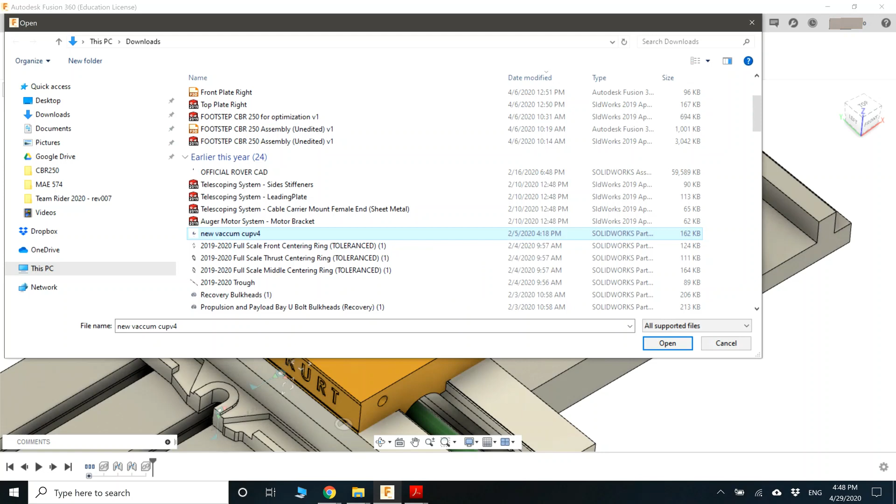You can see here that when I click on import, the SLDPRT part, it's actually processing it, and it's gonna be able to open the part straight from SolidWorks, which is really good. But sometimes if you have a very complex shape, that might not be the best idea. You may be better off if you just export the file on SolidWorks from SLDPRT into a STEP file first, and then you import the STEP file into Autodesk Fusion. This might process a little faster if you have a complex shaped part.

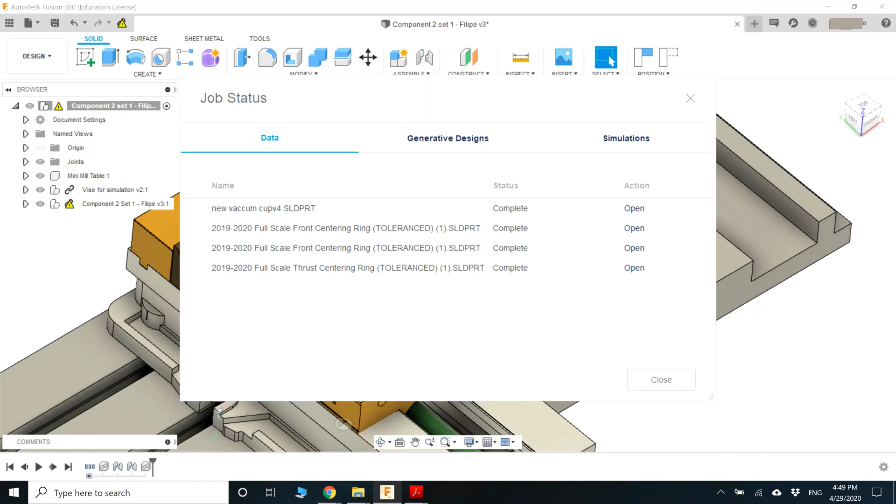Once we have the part in here, I didn't really use the part that I just imported, it was already here. So once you open the part, you can pretty much do anything that you would do with a STEP file in any other CAD software or any CAD model, any solid model. You can create new sketches, create new planes, and start constructing stuff, start extruding stuff, start filling up holes, making fillets, you name it, just like any other regular CAD software, okay?

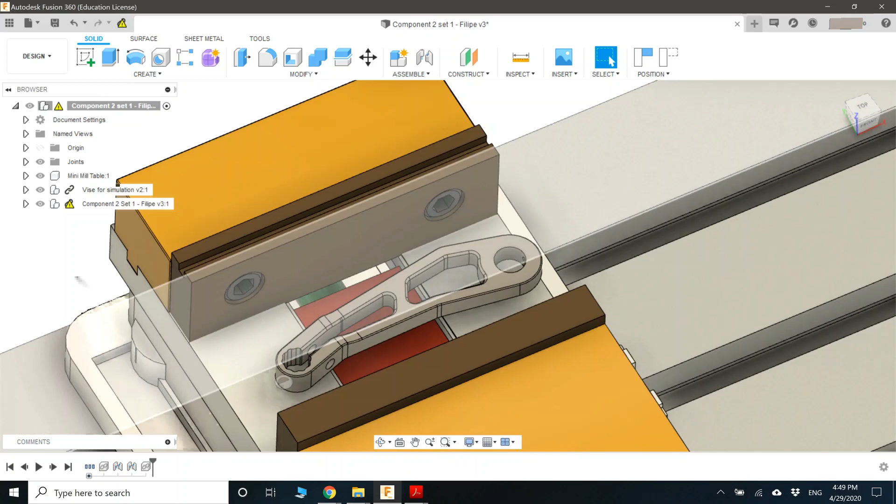In our case, we're not really going to change anything in this file. Remember, this is just a tutorial, quick introduction on how to get started with manufacturing. So we're going to switch from the design workspace to the manufacture workspace.

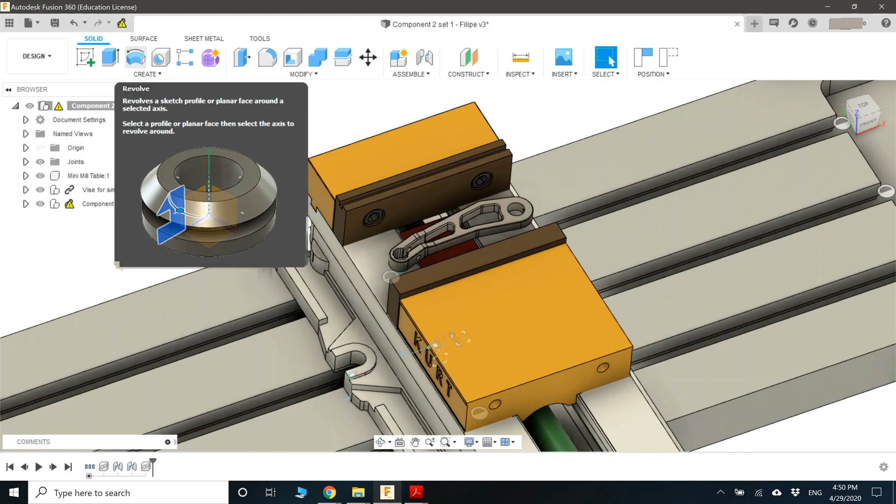One thing that's very interesting from Autodesk Fusion is that whenever you pass the mouse on top of something and you let it sit there for about 2 seconds, it's gonna give you a brief explanation on what this thing exactly means, what this command exactly does. So it's a very good software for this matter, and you should definitely take your time and read through it. Whenever you see something that you're not familiar with, you're gonna be able to see what it actually does. So for example, here we have design, generative design, render.

You can do rendering here, animations just like SolidWorks animations or any CAD software animation, simulation for checking stresses and stress concentration, and also manufacturing. That's what we're concerned with here today. We're gonna switch from the design to manufacture.

Once you switch from design to manufacture, the manufacturing tools all appear here. Again, if you just let the mouse sit there, it's gonna show you exactly what each operation means. For example, 2D milling operation, we have milling, turning, additive manufacturing, probing, fabrication, and utilities.

We're gonna be using milling. This is basically a milling machine work. And we have here a few 2D operations that we can choose from. I'm not really gonna go through all of them. This is just a very brief explanation today, but you can switch between 2D and 3D.

Whenever you can, try to use 2D operations. They're a little simpler. They have a simpler toolpath and might be a little faster. But if you have complex shapes, definitely look into using 3D operations. It might be the way to go, okay?

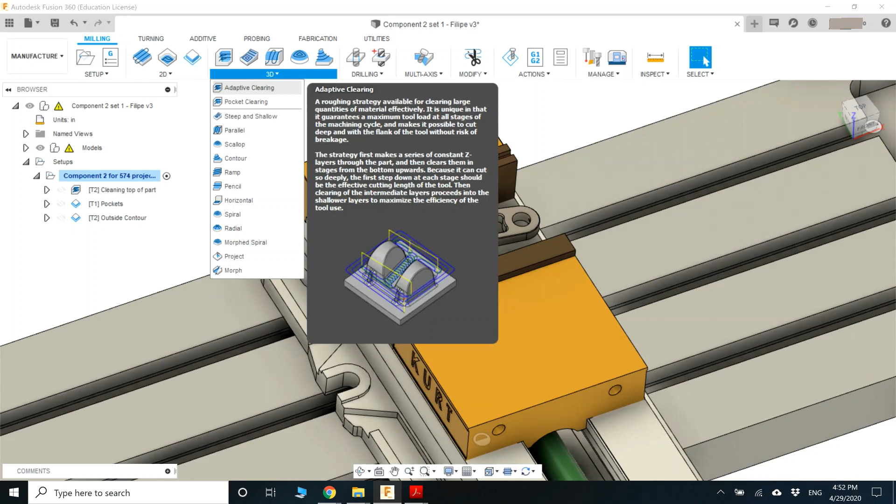We also have drilling operations and other commands here, for example, actions to simulate once you're done programming and generating your G code.

So the very first thing I need to tell you guys is that it's a very good idea to always have your setup complete before you start making your manufacturing operations, okay?

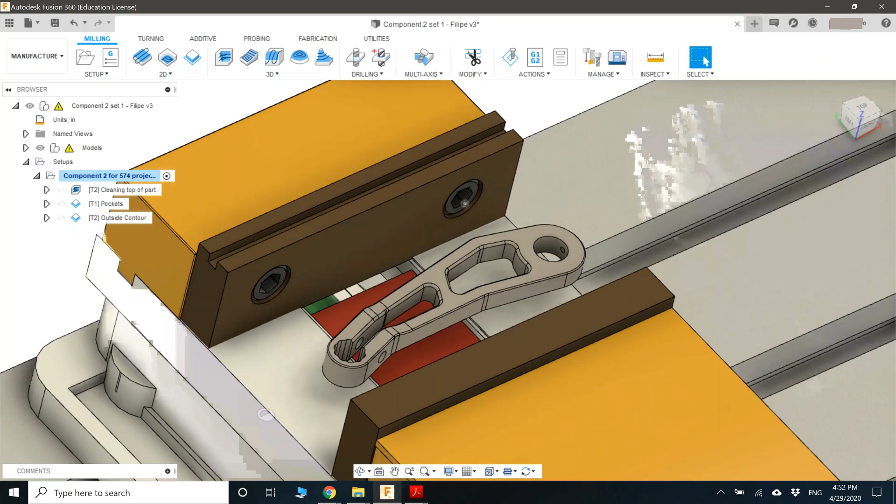In other words, you guys can see that I have a vise right here and we have a table right here. It's very important for you to have these things because once you simulate your programming, you will be able to see if the tools or the head of your machine is gonna crash into something, for example, the vise or any other fixture that might be around here. So make sure you always add your fixtures in your drawing, okay?

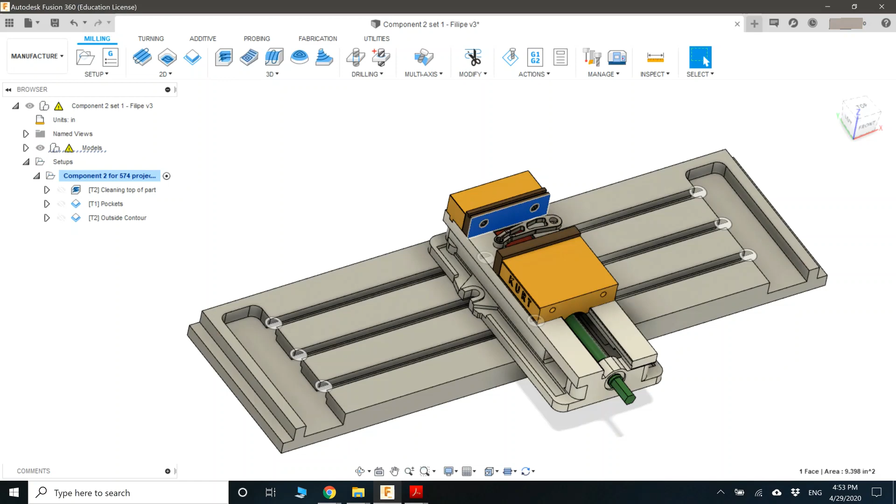One thing I also have to tell you is that this software's commands for the mouse, you can choose to best fit whatever software you're already used to. So if you click on your name on the top right here, then click on preferences, you will be able to switch from the regular type of mouse command to the actual software that you're used to.

In my case here, if you see the general panel, you see preference controlling general UI behavior. You'll be able to change the pan, zoom, and orbit shortcuts from Autodesk Fusion to SolidWorks. I'm already used to it. It's very hard to get used to a new software. It's not hard, but it can be pretty annoying.

So you can switch it right here if you're already used to SolidWorks. If you need to change your units, you can also go through this panel here and change your standards, Z up, for example, or Y up. In my case, our machine has the Z axis going up, so we're gonna keep it Z up. Then we click on OK.

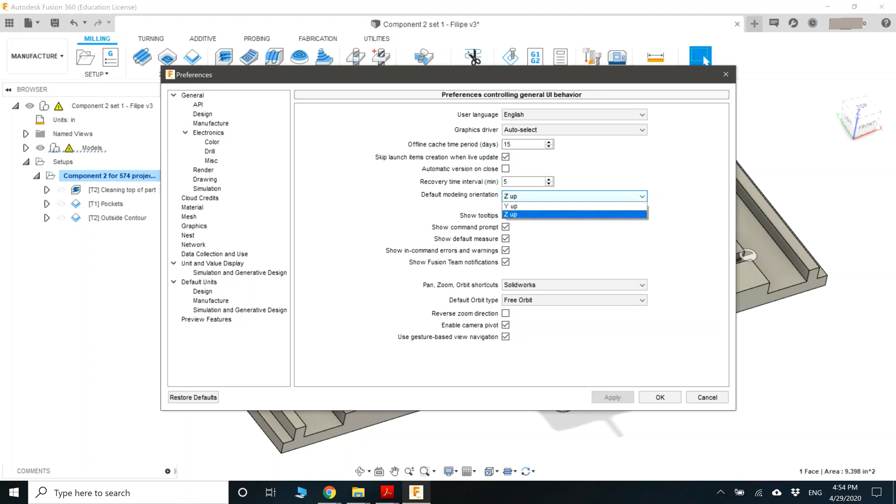Also keep in mind that this here needs to be consistent with your machine, the units, so you can switch from inches to metric to millimeter right here. That's the very first thing you should be concerned with when you're working with your part, okay?

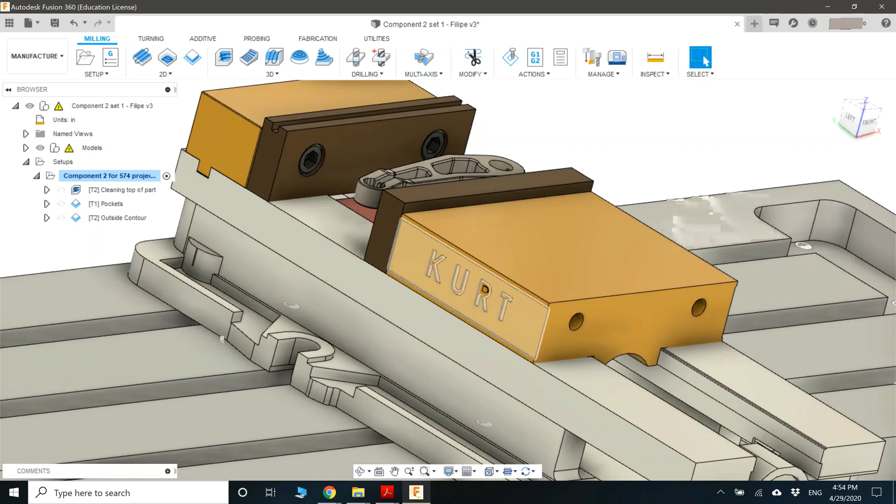Now, going back to the table here, we're using a Haas mini mill with a Kurt vise. How did I get these things here? The Kurt vise, for example, the drawing for this, I got it from online. Sometimes the manufacturer of the vise will give you the 3D drawing for the fixture that you want to use, so it makes it very easy for you to add it to the assembly.

Now, if you want to add it to the assembly, you have to switch from manufacture to design and do all of your assembling in the design workspace, okay? Now, once we add the vise, how did I get to this table here?

SolidWorks—well, Autodesk Fusion also has a very interesting capability. If you click right here on your Show Data panel, and if you click on home, on your home screen, you'll be able to scroll down and actually see samples right here. You can click on CAM samples, and then you have a few different manufacturers of CNC machines.

For example, Haas demos, you can actually see the VF2 table and a fixture here, and you can also see a bunch of different types of fixtures right here, for example, a table with a vise, a table with another fixture, just two vises, a chuck, and so on and so forth for turning operations as well and milling operations.

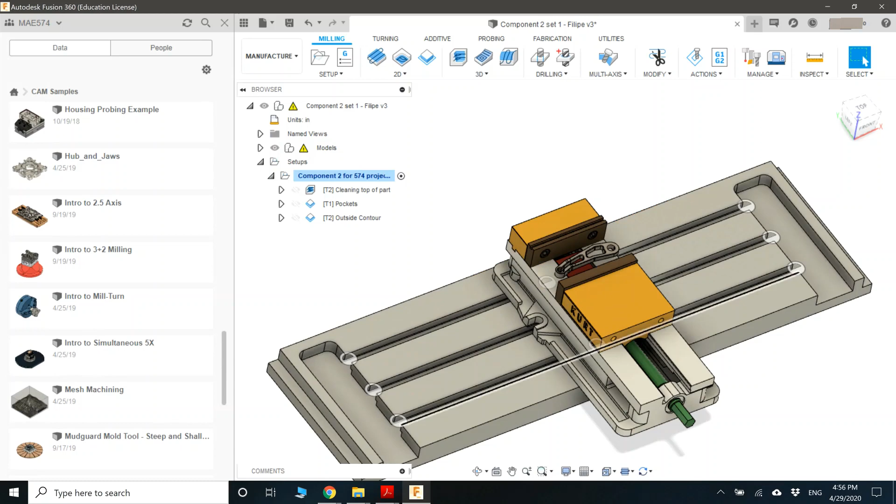So explore this, it might be very useful, very helpful. You can also see clamps here. So this might be very helpful if you want to create your setup here before simulating, so you can see any potential crashes.

It's extremely important to have this in mind. Okay, that's it that I wanted to show you in the data panel.

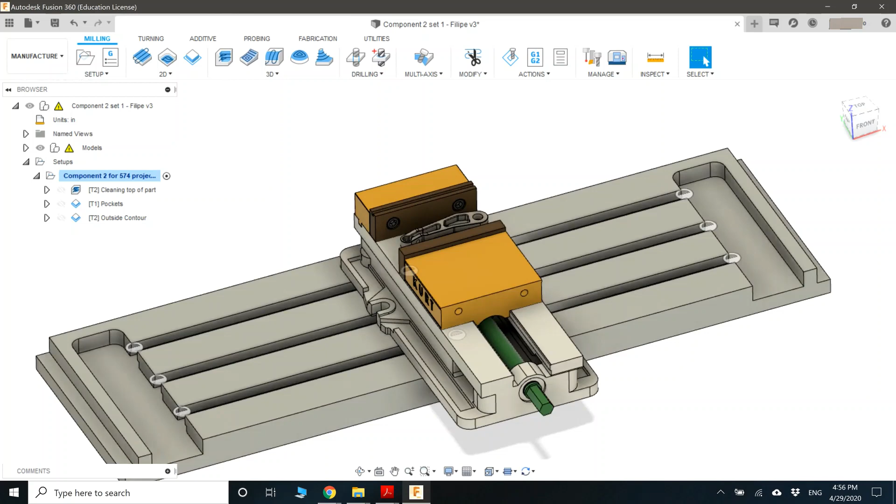If you click on home, you're gonna have your home menu here again. I'm gonna hide it for now so we have a better view. And now we're gonna start doing the manufacturing operations per se.

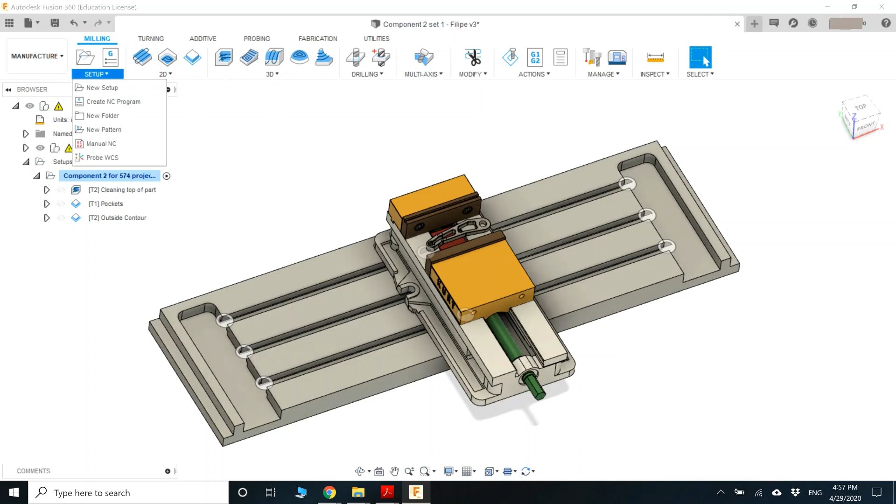So what do you have to do when you very first start to program something for manufacturing? Again, switch your unit. If your machine is in metric, in millimeters, switch it to millimeters. If it's in inches, switch it to inches. Once you're done with this, you create a new setup. So you're gonna go to milling, setup, a new setup.

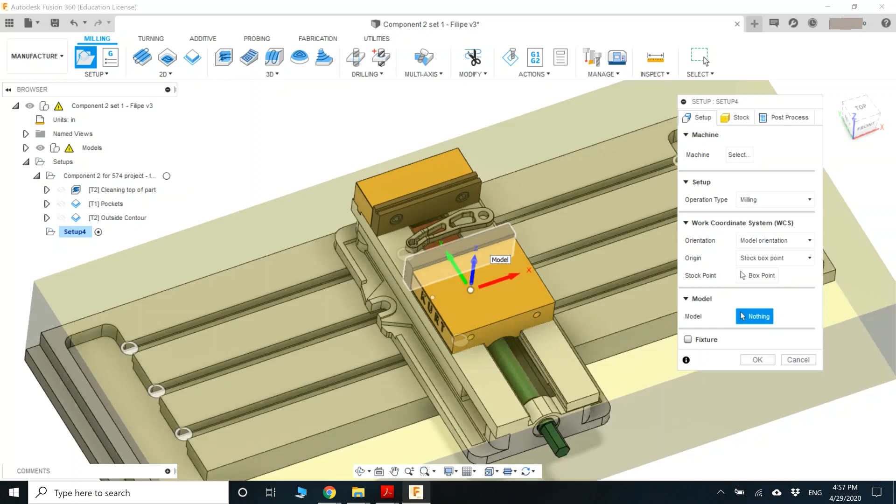The very first thing you need to do, in this first window here, you have the setup window, stock window, and post-process. We're gonna go through all of them, but the very first thing you need to do in your setup window is to select your model. Which one are we gonna be working with?

And it's this one right here. So I'm not working with the vise, for example. I'm working with only this one, so I have to make sure this is selected. If you select something else by accident, for example, the table, you see two bodies here, just remove it and select the one that you're actually interested in working with, which is this one.

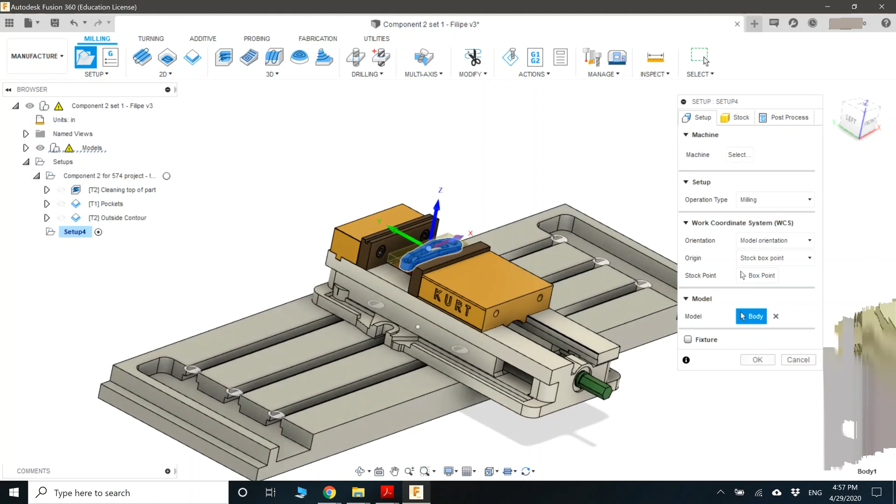Now, X, Y, and Z. This will be your G54 coordinate system in your CNC machine. If you're not planning to use any other coordinate system besides G54, let's say you want to use G55, 56 or something else, I suggest you to not change this. This is standard in machining. Try to always stick with G54 when you can.

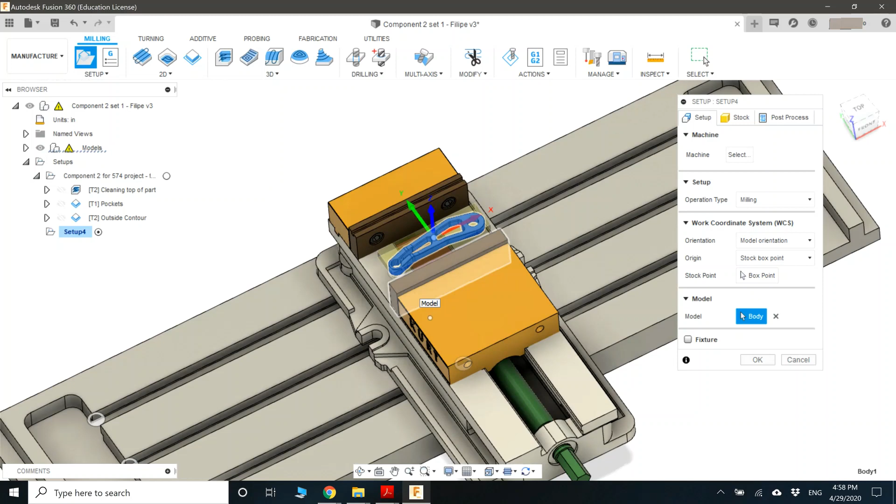If you cannot, if you for some reason you need to keep the G54 for something else, then go ahead and use it. But you will have to change a few other settings here. For example, WCS, work coordinate system in the machine. You have to change this and make sure your G code is exporting the correct G code for you instead of G54.

I'm gonna put in the description of the video a link for standard G codes, so you know what I'm talking about. If you're new in machining, G54 is a very important code, and it actually means that it is gonna be your zero. So if you're not familiar with it, try to familiarize yourself with some very common G codes. G54 is one of them.

Now, once we have our body selected here, our work coordinate system, in our case, we're gonna be putting it in the back left corner of our stock material. So if you guys notice, the blue body is the selected body that we're planning to machine out of the stock material. The stock material is the yellow, transparent, translucent square or rectangle that you actually see here.

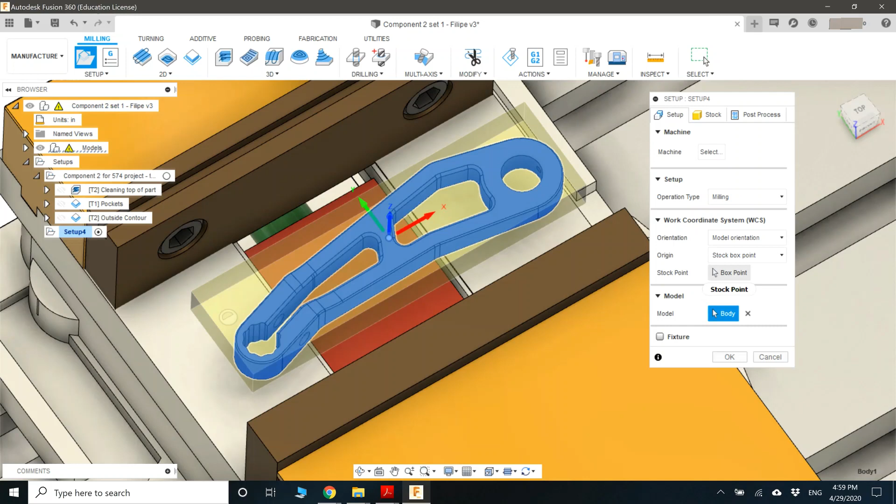So we need to make sure that our work coordinate system zero is in the back left corner of our stock material. So I'm going to click on box point for stock point, and I'm going to click on the back left corner. Remember, the X, the Y, and the Z, they need to be consistent with your machine.

In our case, we're using a Haas mini mill, and yes, we have the X positive to the right, the Y positive away from you. So if you use the right hand rule, positive X right, positive Y away from you, positive Z up. Just think of your thumb, the thumb is going to be pointing up when you do your right hand rule.

So this is consistent with our machine X, Y, and Z, and we have it to the point that we actually want it. Why do I want it right here? Because when I use edge finder, I'm gonna be touching my edge finder on the left edge and on the back edge right here to zero it.

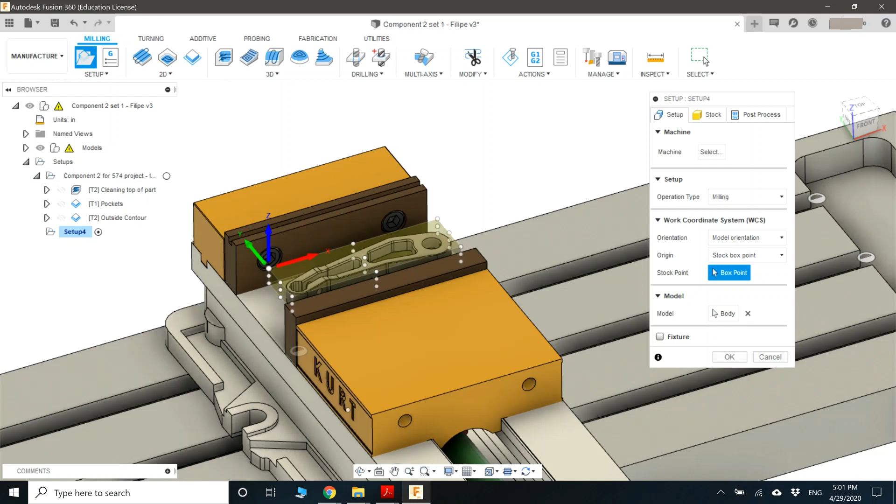In my case, I'll be touching it on the jaw of the vise to zero the Y, and on the jaw of the vise on the outside part right here where the mouse is at to zero the X. So touch the edge finder here, zero the X, touch the edge finder here, zero the Y. And then the stock material will be lined up with the front left corner of the jaw of the vise, the back jaw.

Okay, stock material. It's standard from the software to leave it as relative size box. I generally try to not use relative size box here.

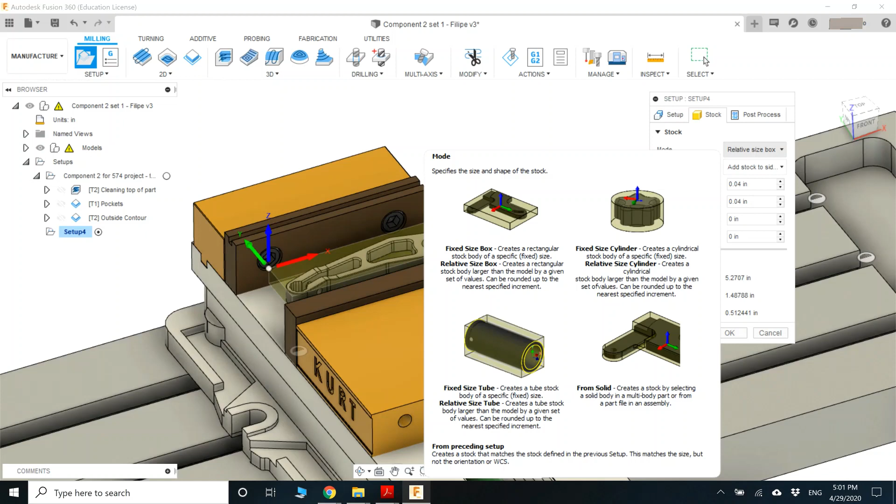I try to use always a fixed size box - if you pass the mouse over and let it sit for a few seconds, it shows the difference between options. You can go through it on your own later. Basically, if you use a fixed size box, you tell the software the width, depth, and height of your stock material.

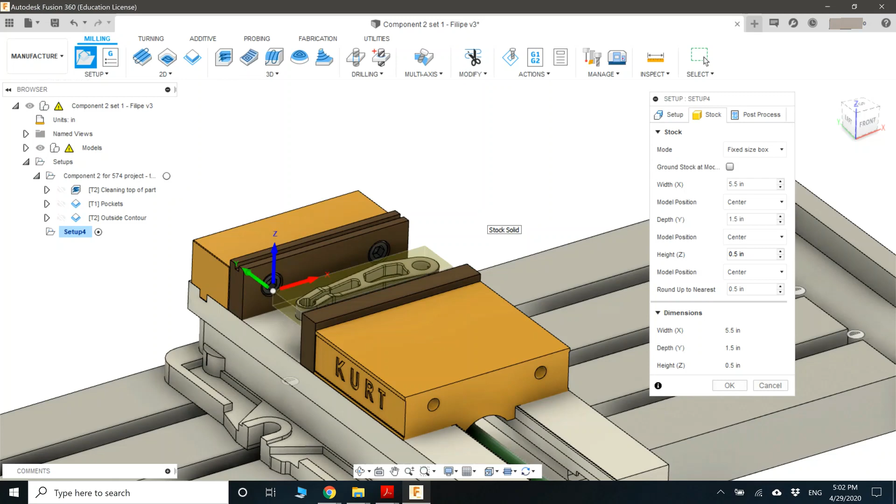This is much better for me because I try to use scrap aluminum and scrap steel when I can. I don't have material cut to the dimensions I want yet, so I grab scrap material whenever I can use it. I don't cut it, I just measure it and make sure it matches my dimensions here.

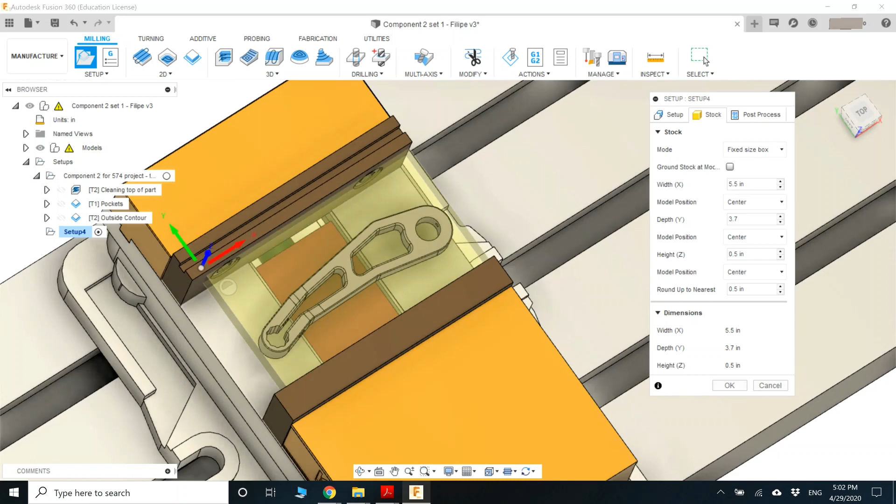In this case, I'm just gonna put random numbers here to make sure we're big enough with the stock material, so when we cut outside, the tool isn't gonna hit the jaws of the vise. I'm gonna leave about 3.7 inches on the Y direction. Let's see if this is good enough - yeah, 3.7 should be fine.

And then on the X direction, I'm gonna probably leave it at 6 inches. Again, 0 is gonna be the back left corner of our stock material.

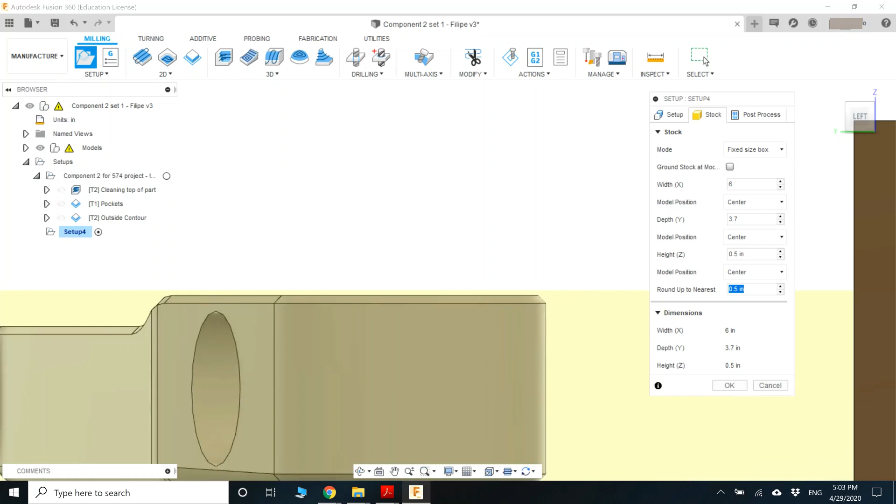Okay, height for the Z. If you orbit this thing and click on the left, right top corner, you'll notice that the maximum height of this part is less than half an inch, or almost half an inch. We have a little bit extra on the top and bottom here.

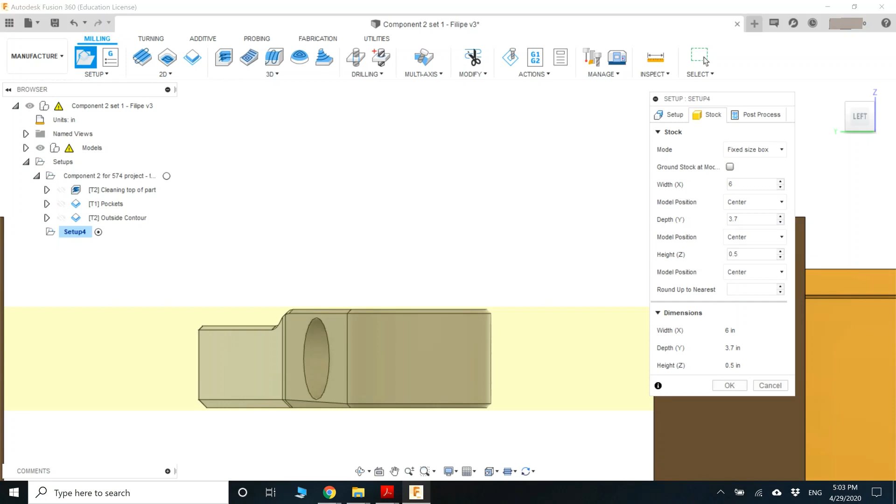If you put a quarter of an inch here on the height - round to nearest - it's gonna show red. This means your stock material is not thick enough to make the part you actually want. You want to make sure this is at least the thickness of your part, otherwise you're not going to have the real deal - not what you're actually programming for.

Now if we go 0.49, it's still a little bigger - 0.48, 0.47. Now you notice that 0.47 is already shorter than my part, so 0.475 will be bigger. You can figure out how big your part is by changing the number here, or just measuring it straight with the inspect tool - click on measure and measure from there.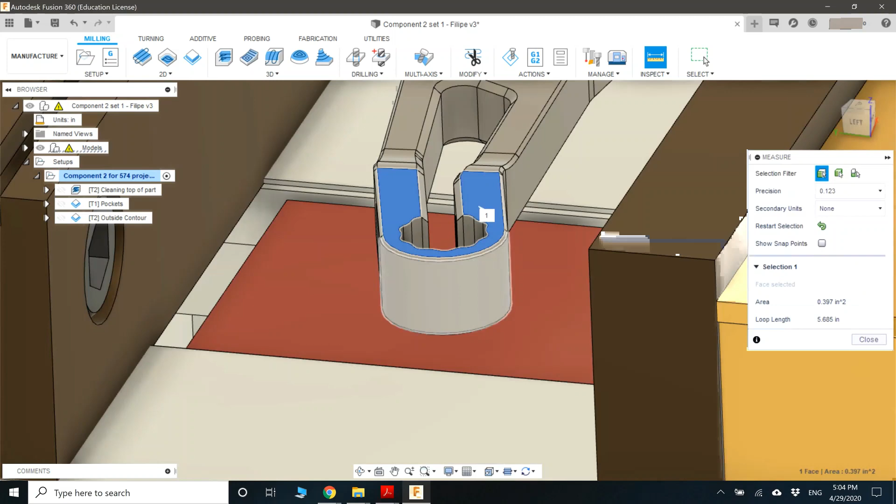If you select the top face and the bottom face, it will give you the maximum thickness - it's 0.472. So in this case, your stock material needs to be either half an inch or 0.472. In our case, our stock material will be a half an inch. Why did I leave it at half inch?

Because we can cut the rest from the top there. So what I'm gonna show you is that we're leaving it at half inch, and instead of positioning the model on the center of the height, I'm gonna go offset from bottom, and instead of this number, I'm gonna put 0. You'll notice the part actually drops down to the minimum height here.

So we still have this thin layer to get rid of on the stock material. You can position your part on the stock material based off the center, like right on the center of the XYZ, or offset from one of the sides. So it's a very useful capability here.

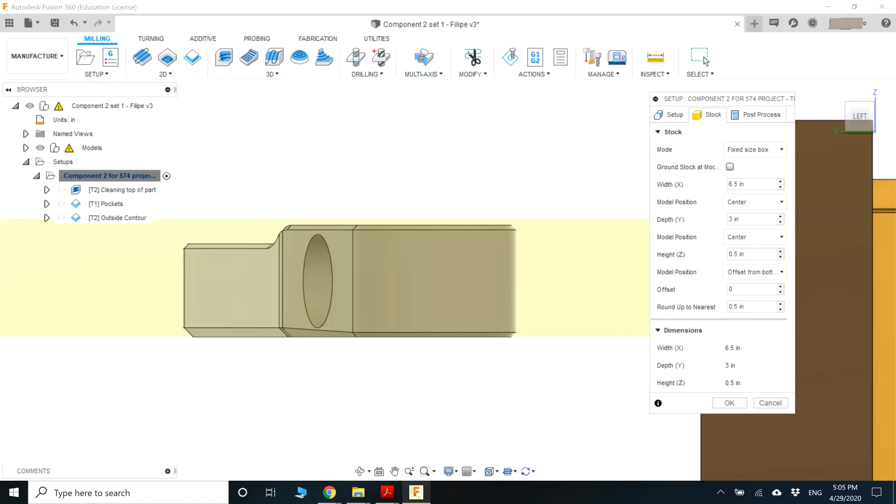Once we have this set up, let me go back to my 3.7 on the Y. Oh, not too much - 3.6, 3.3, 3.2, 3.1, 3.3. Yeah, let's leave it like 3.3.

This is just a demo. If I were doing this exactly how I will be doing it, I would make sure the stock material is actually tangent to the jaws here. I'm not going to do this right now because it's just a sample for the operations - we're not really concerned about it at this time.

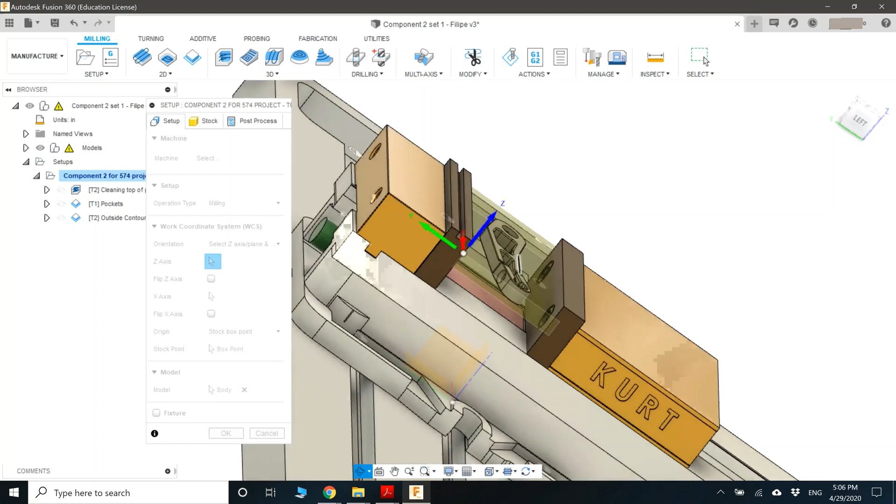Once you have the stock material properly set and your setup properly ready to go, XYZ on the top left back corner, then you can click on post process. Only change this if you really want a standard number for your programming, but in this case I'm just gonna leave it as is. Click OK, and then we can start with our operations.

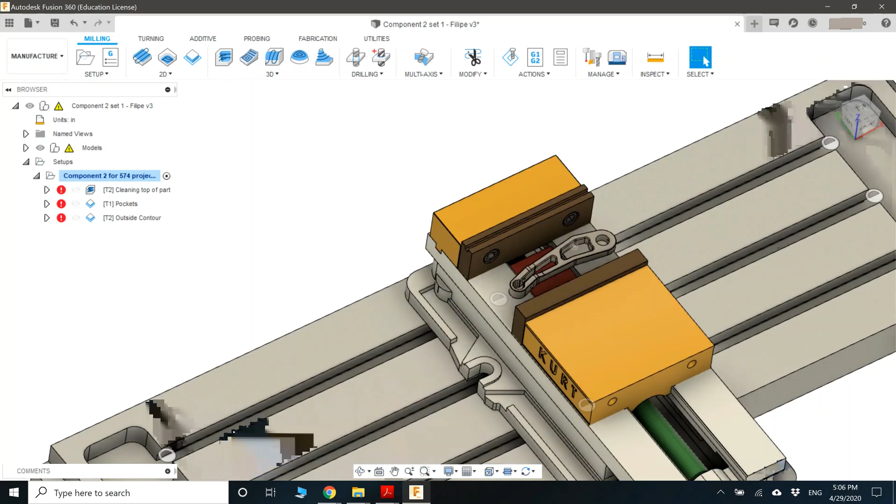Before starting this video, I already made some operations here. We're just gonna stick to the operations I made. So which one did I do first?

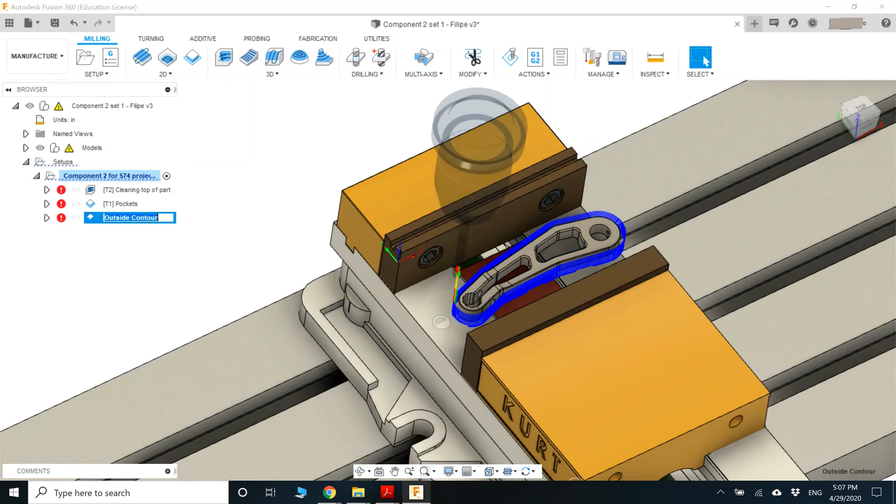First one was cleaning the top of the part. By the way, whenever you're done doing an operation, if you want to rename it so it's easier for you to identify, you just click on the name and then you can rename it. Okay, this name is going to be the same name as it appears in the G code in a comment format. So it's always a good idea to name these things here so you know what you're actually doing on your part.

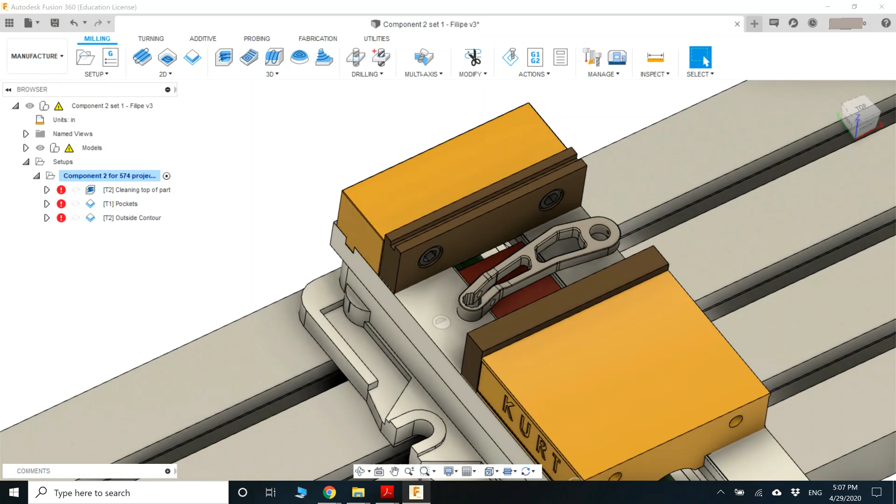This is for showing or not showing the operations if you just remove the mouse here. But I'm not really gonna show this. It's a little inconvenient to see when you're showing everything. It's only gonna show when you pass the mouse on the operation. Okay. If you drop this menu here, it's gonna be showing you the tool that you're using, basically what this operation will be in a G code format.

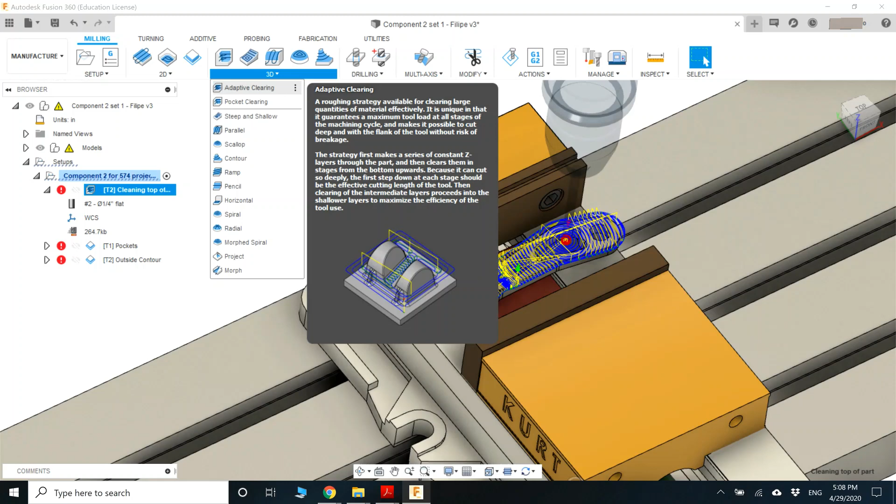Okay. Now, what type of operation are we using here? In this case, we're using a 3D adaptive clearing. Why am I using a 3D adaptive clearing? If you guys notice the shape of this part here, it's not perfectly flat. There is a little ramp here. When you have complex shapes like this, it might be a good idea to use a 3D contour or a 3D clearing. This will help you a little bit in generating the toolpath for your part.

So how did I create this one here? Basically, you click on 3D adaptive clearing, and the very first thing that you have to do is to set up a tool. You have a few tabs here. We're gonna go tab by tab: tool, geometry, heights, passes, and linking. Let's go to the tool one first.

Very first thing you need to do is to select your tool. How do you select this? You can either import libraries, or if you work in a place that already has these things set up, you can ask them for the setup or the libraries. But if you want to start from scratch, you can create a tool right here. Once you open up the select tool window, click on new mill tool, and then go to the first tab, general, give your description, vendor, product ID, product link if you want to. This helps you to keep track of things.

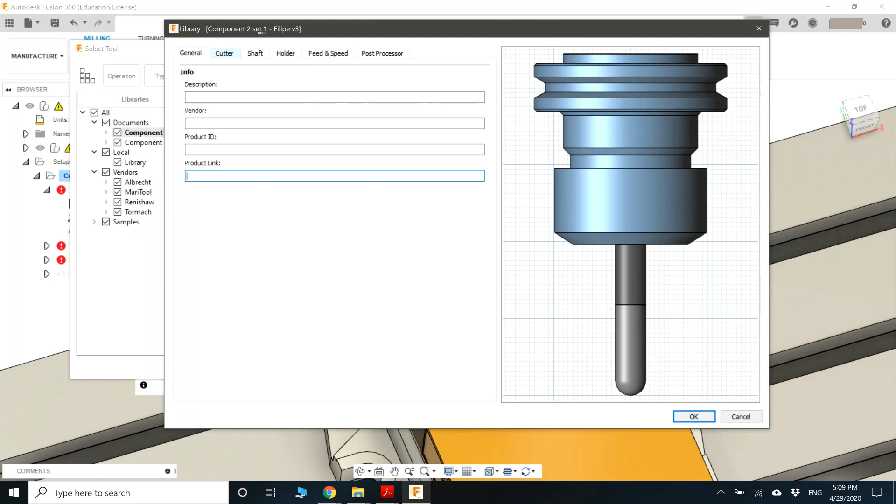Then you can click on the cutter, and select a ball end mill, a flat end mill, bull nose end mill, drill bit, center drill bit for different types of operations. In our case, we're going to be using a flat end mill, 2 flutes, carbide, no through tool coolant, in inches. These details I'm gonna discuss in a future video. Properties of carbide tools, high-speed steel tools, lengths, diameters of tools, number of flutes. We're not worried about it at this moment.

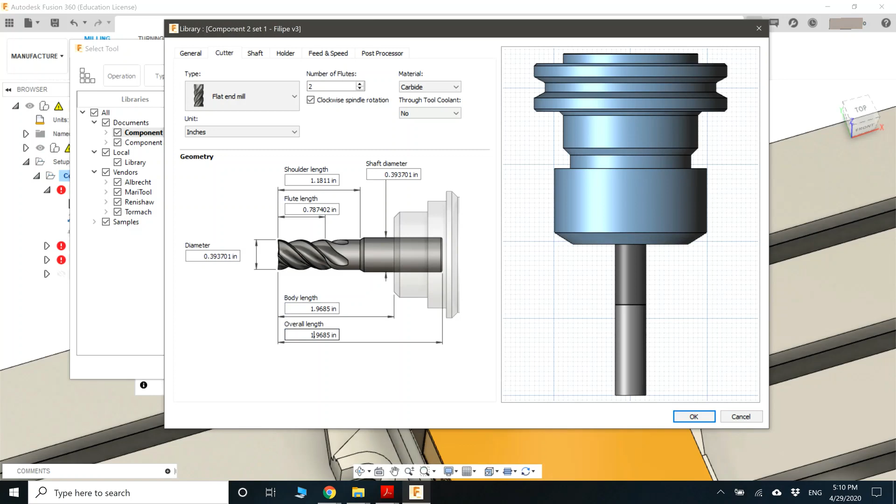But basically, make sure you always match your tool here as accurately as you can. Let's say you put a different length than your tool actually has. If you just run the simulation, it might work, but in real life you may crash the machine because your tool is not long enough to cut the entire part. So always try to match as accurately as possible to the real world, okay?

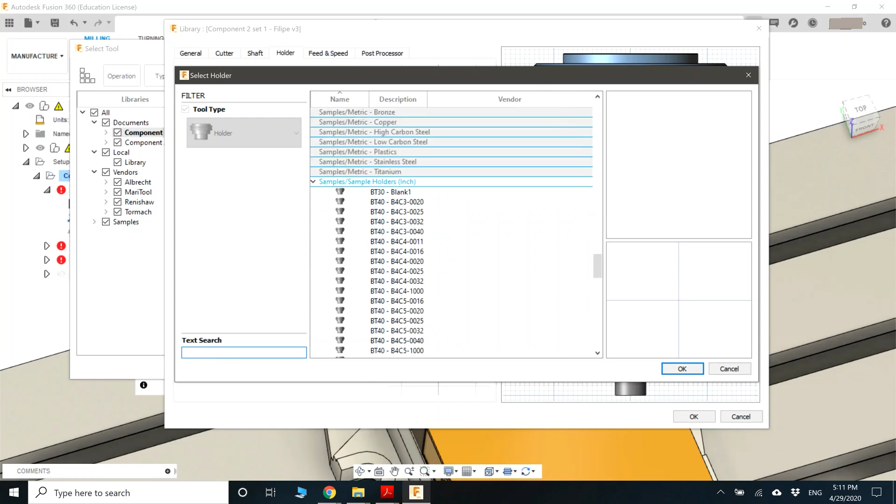Once you're done setting up the cutter, you can set up the holder. Shaft, I'm not really concerned about it at this moment, but the holder, always try to match something very similar to what you actually use. If it's a Cat 40, Cat 30, try to find it here. If it's not the exact one, at least something similar. And if you can't find something similar, try to import it from somewhere online.

Once you're done with the holder, feeds and speeds. When you set up the feeds and speeds here, these will be the standard feeds and speeds for the tool in whichever other operation you use this tool. So it's a good idea to have some standard numbers here, because when you start another operation, you don't have to set it up all over again in your tool setup tab in your operation.

So it's all gonna be ready to go there. Post processor. Again, going back to feeds and speeds, I'm not really going to talk about this because this is very specific. There are calculators online for how to calculate these things. I'm going to go through it in a later video, but for now we're going to use standard numbers that I have already figured out, okay?

In the post-process tab, this is very important: the number of the tool that you're programming right now must match the number that you have set up for this tool in the machine. In other words, if you're using a 1/4 inch end mill in position number 3 of your machine, let's say you have a carousel that holds up to 10 tools, the carousel tool number 3 needs to match this number here.

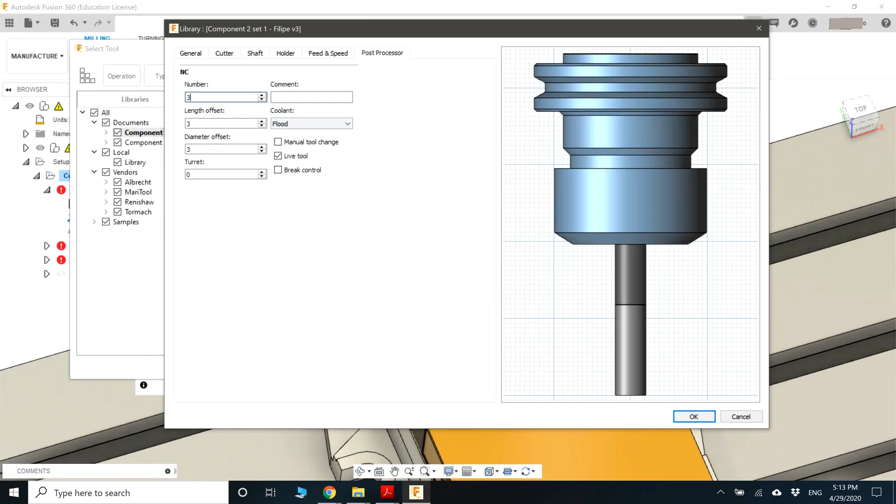Once you're done, I'm not gonna save this because I already have it saved. You're gonna see your tool right here, and then you click on select tool and click on OK. And then that operation specifically is gonna be made with the tool that you just selected. In this case, I'm using tool number 2, a 1/4 inch flat end mill.

Second one here, coolant. Are you using coolant or not? Are you using an air system or not? You can choose it right here. I'm gonna be flooding coolant, so it's gonna activate. If I'm not mistaken, it's the M8 code. It's the code for starting the coolant non-stop, okay? Coolant flood. So that's M8 right here.

Feeds and speeds, we're not gonna go through these here as of now, but keep in mind right here, plunge feed rate. This is extremely critical. If you go too fast when you're plunging a tool, you may crash your machine, you may crash your tool. So it's very critical that this is low enough that the tool doesn't crash or get damaged, nor your part, the stock material, or your machine.

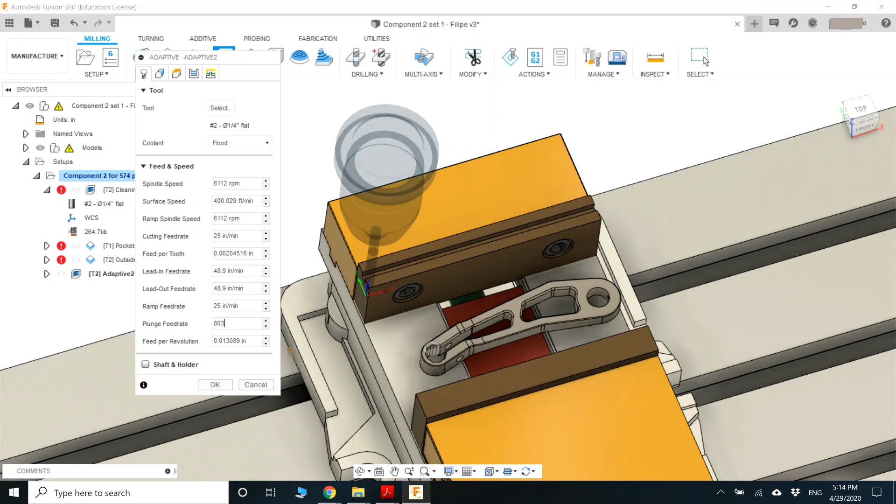So you can't just go 80 inches per minute here. That's way too fast for going down on the Z. So we're gonna leave it at 3 inches per minute for now, just to be safe. And we're gonna go to the geometry tab. For this part, we have the selection that we want to cut. I selected the top contour, and that's basically what we're gonna be cutting.

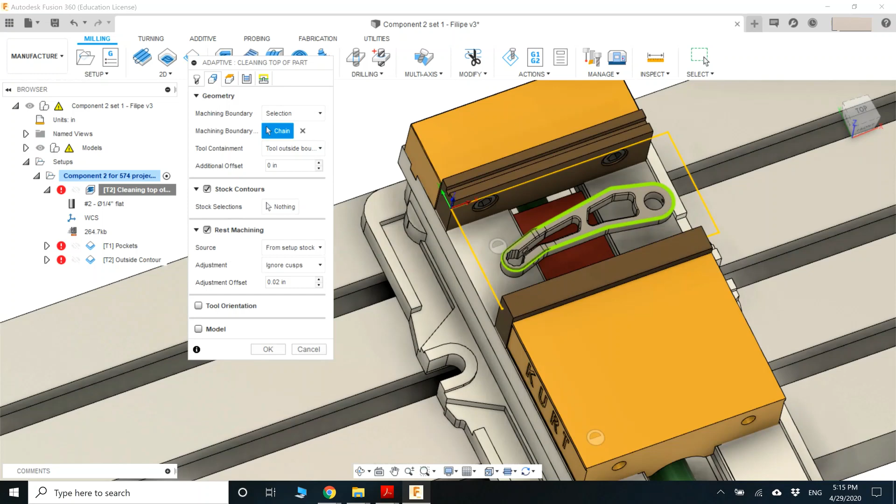Then we switch to the heights tab. Where is it gonna stop cutting in this 3D contour? I selected the face. This means that the tool is gonna stop cutting when it gets to this height right here, the minimum top height of our part. This is the selection here. So it's gonna do the ramp and it's gonna stop at this height right here.

Now we go to passes. We don't want to leave any stock. If you wanted to leave a little bit of stock, let's say 10 thousandths of an inch for a nice finish, we would select stock to leave, and it would leave some extra stock right here. In our case, we don't really want to leave any stock, okay? So we're just gonna leave it unchecked.

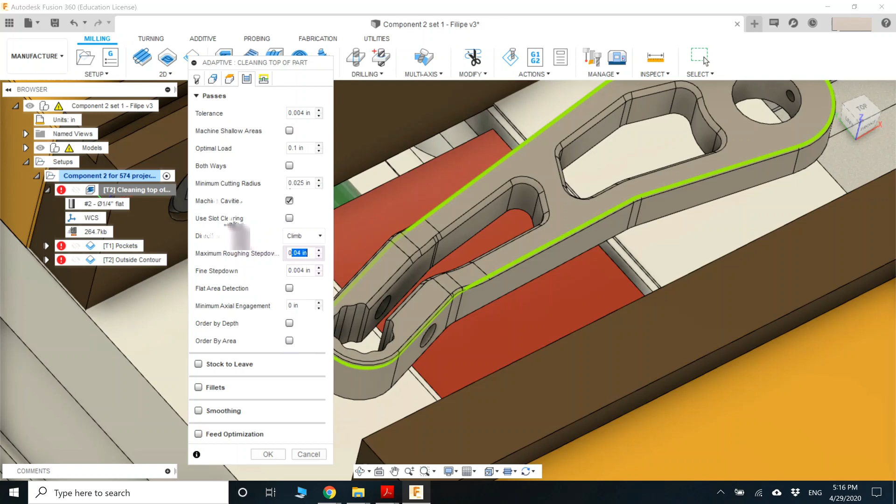And then you can also select here the maximum roughing step down. This basically means the depth of cut, how much it's gonna cut at a time, so it doesn't go too hard on the tool or the stock material. It's 40 thousandths of an inch, 0.04 inch. We're gonna leave it as is.

And linking, you don't really want to mess with this unless you want to have the tool start at a specific point for some reason, like, let's say, it may crash in that place. This is where you would change it. Or if you want to change the type of ramp, whether it's a helix, just plunging down, or pre-drill, you can also change it right here. I'm gonna leave it as is, the way I had it before. I'm gonna click on cancel, but if you're programming, click on OK.

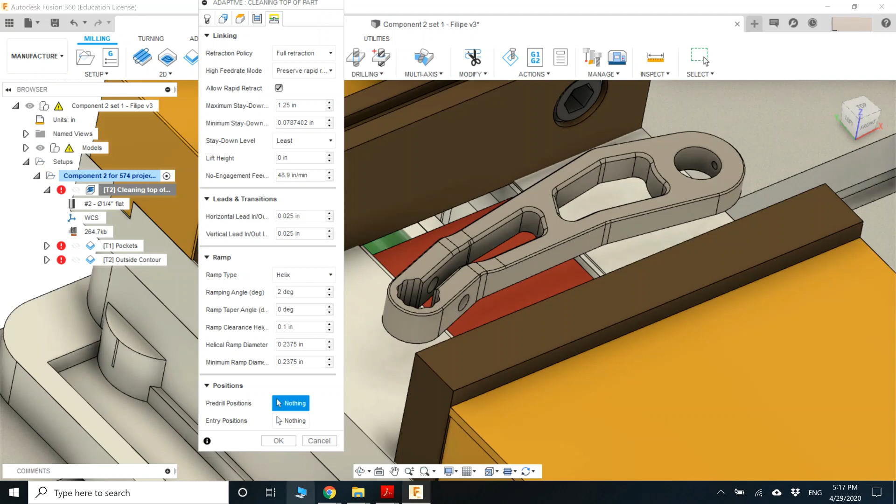All right, let's click on OK here. It's gonna calculate it again. So it's calculating the tool path, 2.9% as of now, 57%, and now we have the tool path calculated, or it's still calculating it, okay? It depends on your processor.

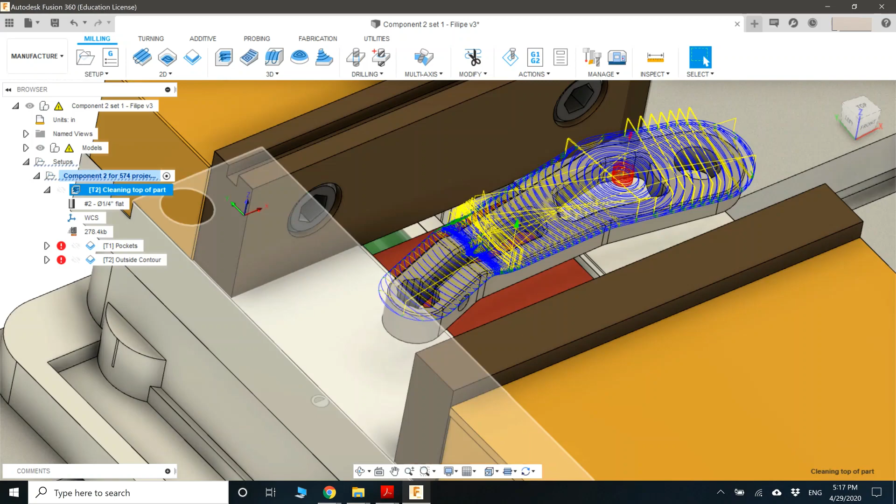Once we have the tool path calculated, the blue lines are the tool path. This is where it's gonna go down, and the red arrow here, this is where it's gonna go up once it's done. The blue is the tool path, the yellow is the rapid movement, okay? That's gonna be the first operation, cleaning the top of the part. Then we wanna do the pockets.

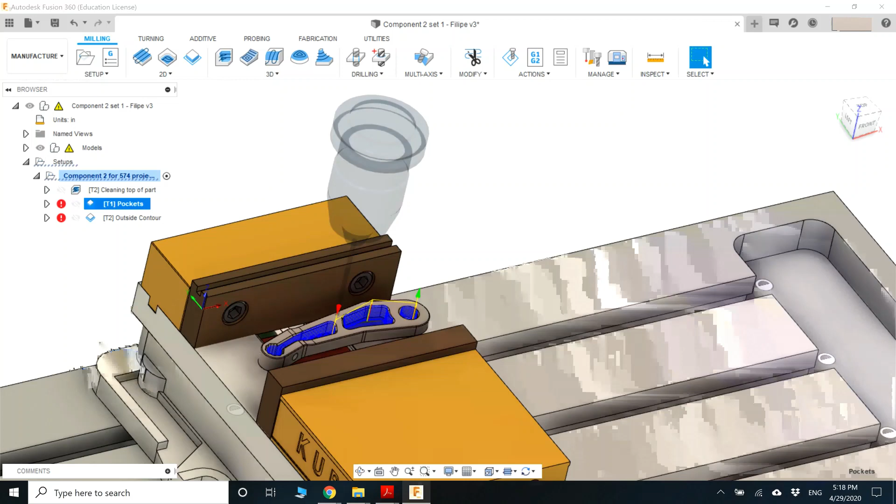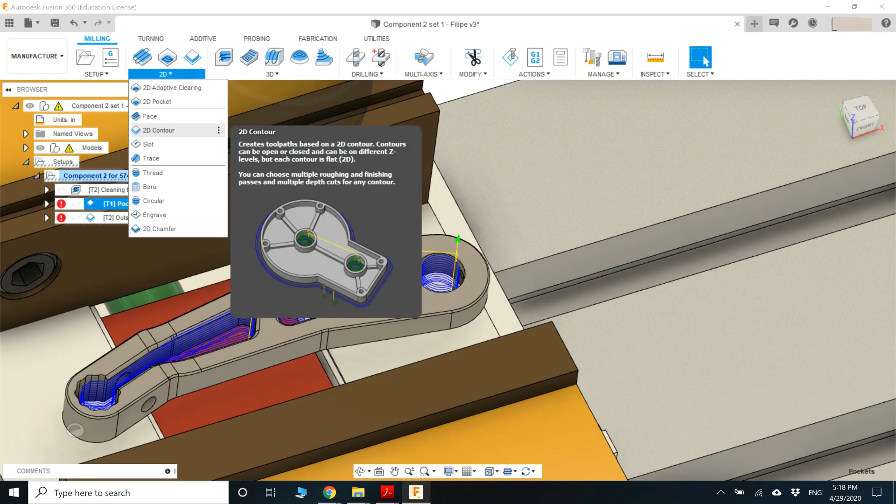Again, remember, try to use simple 2D operations whenever you can. In my case here, I could have used adaptive clearing, 2D pocket, or 2D contour. One of these three here, or maybe even more. I'm using 2D contour because it's a simpler tool path. It's just gonna go around. It's literally gonna contour around, and it's not gonna cut anything in the center. So basically, whatever's in the center here, if it's bigger than the tool diameter, once it's done cutting around, this rest here is gonna drop down.

Same procedure. You have to select a tool. I'm selecting a 1/8 of an inch flat end mill. Instead of being number 2 tool, this is gonna be the number 1 tool. And then fluid coolant, we don't mess with this for now. The geometries that we're cutting here are these 3 geometries here.

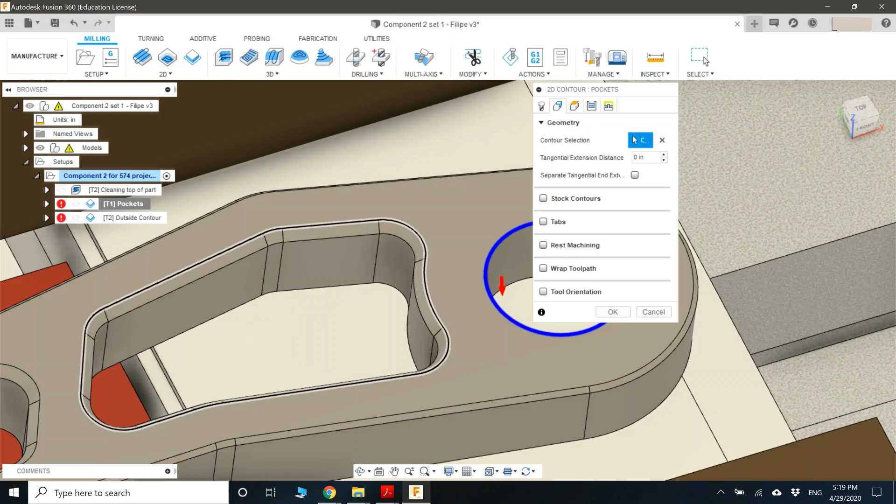Inside of the circle, remember, if you have a fillet, don't select the outside of the fillet here, select the inside, because if you select the outside here, this extra material here will be all gone. This is gonna be cut, so you only want to cut what is inside, not outside of the fillet, okay? Selecting the 3 contours, then go to heights.

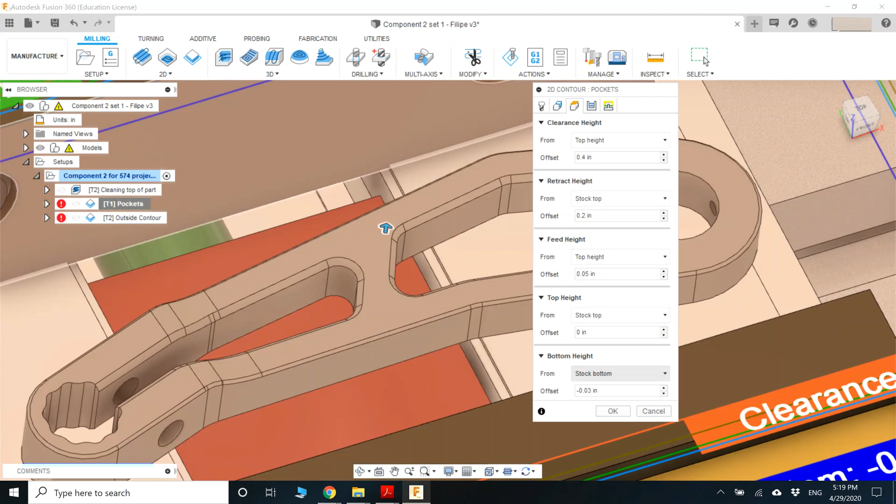Your top height is gonna be your stock top, so basically it's gonna start cutting from the stock top. And the bottom height, this is very important. I left it here set up as stock bottom. Again, if you just pass the mouse, it's gonna show you exactly what each one means. So this is very helpful.

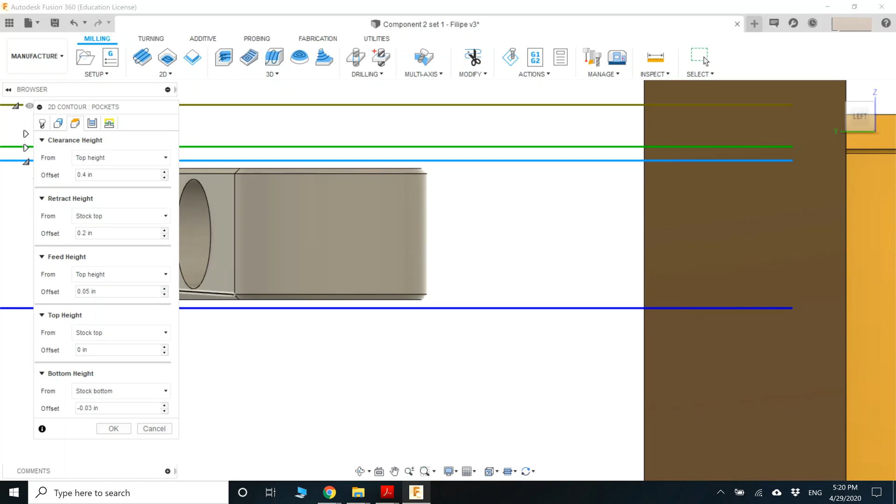I left a negative offset here because sometimes when you machine things and cut all the way through, it doesn't really cut all the way through. It just leaves a very thin layer there. To get rid of this thin layer, I'm giving it an offset. So instead of being 0 right on the bottom of the part, I'm leaving 30 thousandths of an inch extra. So it's gonna go 30 thousandths of an inch deeper, to make sure we cut everything on the bottom there.

Once you have this done, you have the passes. In the passes tab, you can set up multiple depths. Instead of plunging all the way down and cutting everything at once, which is a little too hard on a 1/8 of an inch tool, give it some multiple depths. It's gonna cut whatever you select here at a time. In my case, 40 thousandths, 0.04 of an inch at a time. It depends on the tool diameter. Radial and axial depth of cut is another topic for later.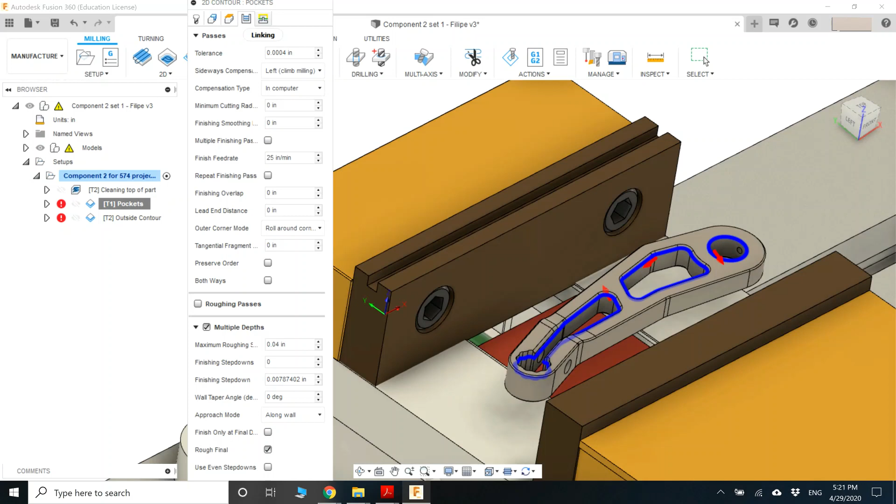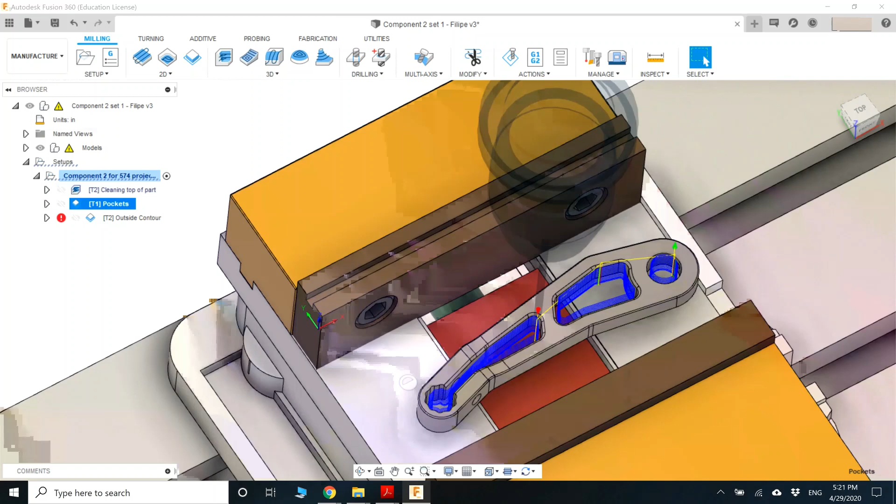Linking, again, don't mess with it unless you want it to be drilled or start somewhere specific. Click on OK, and it's gonna calculate the toolpath, and there you go, you have the toolpath ready. It's simpler than the 3D. You can see how different this one is from this. So try to stick with 2D whenever you can.

Now, one last step here. I'm not really concerned about the fillets right now. This is just a short demo video. I'm gonna do fillets later. But how do we cut the outside of this part? Basically, it's another contour operation. This time, instead of the 1/8 of an inch tool number 1, I'm using tool number 2, a 1/4 of an inch, because we have more space, extra material to cut around.

Feeds and speeds are left the same. Now, one extra feature here are the tabs. So whenever you're making something that you don't want to drop once you're done cutting, you can use tabs. How do you get rid of the tabs once you're done? You can use, for example, a bandsaw. Take your part to the bandsaw and cut off the tabs, and then you can take it to a sander, clean up the remainder of the tabs, so you have a clean part in the end. The tabs are very useful for fast production, high production.

Let's say you want to make 20 of these parts at once, and you don't want to be stopping the machine all the time. Just cut it all, leave some tabs, and then you can knock it out, everything together. After you're done with the production, just take it to the bandsaw, cut it all at once.

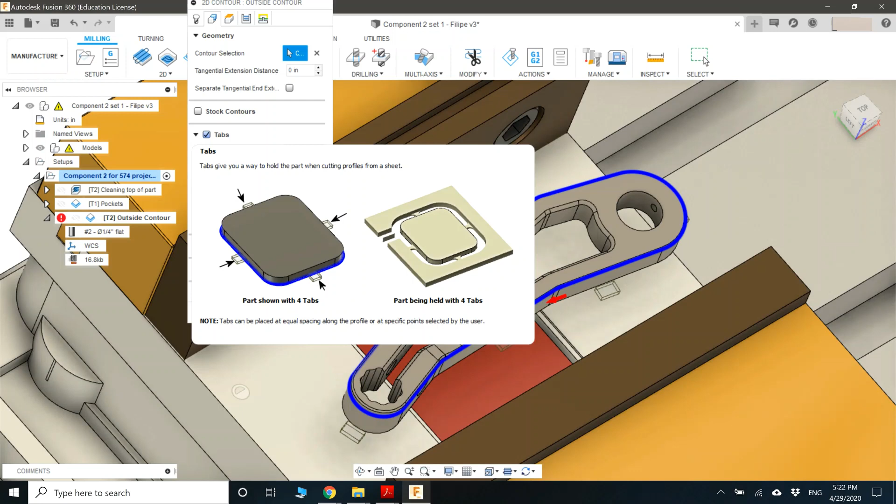I'm leaving here a few tabs, the transparent thing here. These are the tabs. You can choose between by distance or at points, for example. If I click here, it's going to leave a tab here, tab here, tab here, tab here. I'm just using a certain tab distance, 1 inch apart from each other. And also you can choose the tab width and the tab height.

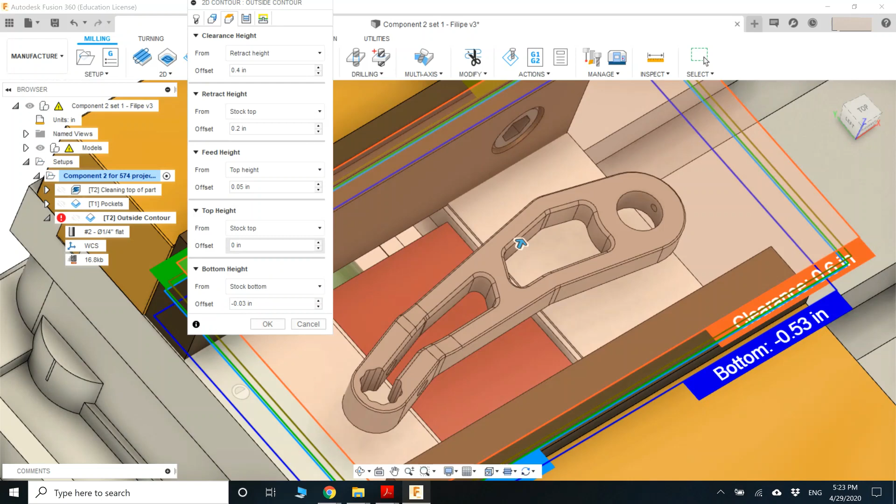Okay, once you're done with this, go to the heights. Then again, I'm going deeper on the stock bottom, just to make sure we cut all the way through the stock. We don't want to leave any layer there. And here the passes, again, 40 thousandths of an inch. Linking, leave it as is for now. Click on OK, and then you have the tab contour generated.

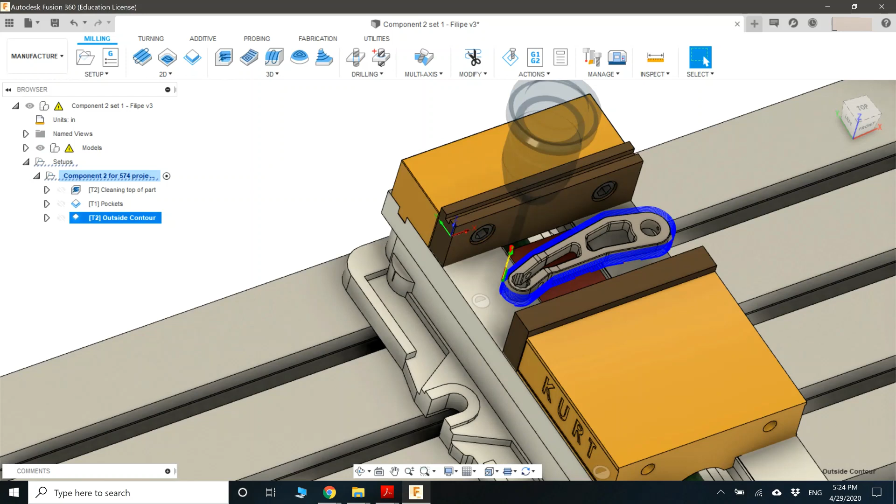Now, how do we go from this to a G-code? We have programmed it all. Very first thing you need to remember, whenever you select one operation, if you click on Actions and Simulate or Post-Process, it will export only this specific task. If you select 2 of them, it will export these 2. If you select all 3, it will export all 3. But if you want to export all of them, it's much easier to just select your setup, this setup right here, click on Actions, and either generate, simulate or post-process. Generate is going to generate the toolpath again. It's all generated, so we don't need to do it.

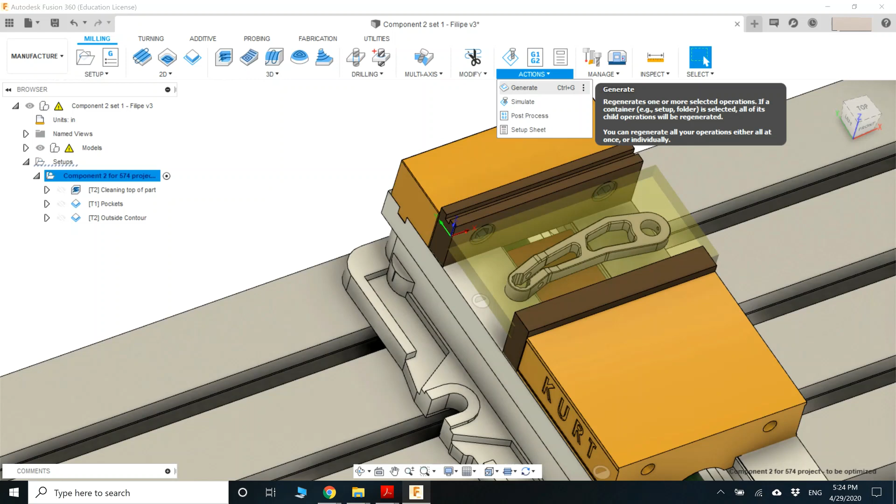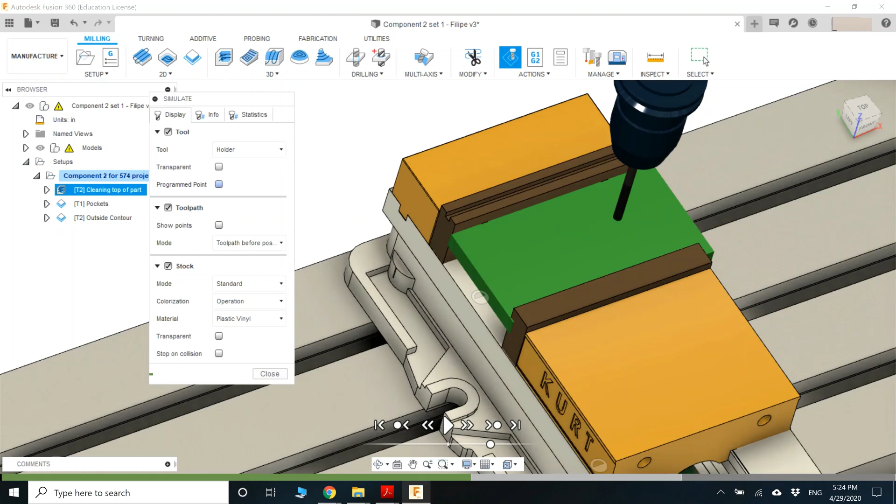Now, before we post-process it, we certainly want to simulate it to see how it looks before we actually generate the G-code, okay? Now, if you want to show the stock, it's green here. If you undo the stock selection, it's not showing anymore. If you click on the stock selection, it's showing again. I'm gonna leave it showing, and I'm gonna start the simulation right here, and it's gonna show us exactly what it's gonna do.

A few things here: information, it shows you the real-time XYZ position, 40 thousandths of an inch. You can actually see that it's consistent with what we programmed. Feed rate, movement type, spindle speed, everything as we have programmed. Statistics, how long it's gonna take to do this entire part. Remember, this machining time is for all 3 operations because we exported all 3 at once. So about 31 and a half minutes to do all of the operations. You can speed up your simulation here. You can slow it down here as well.

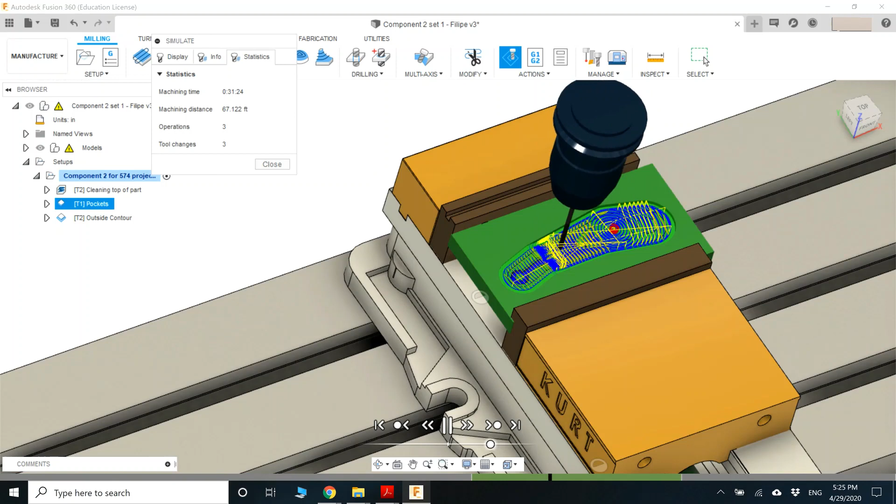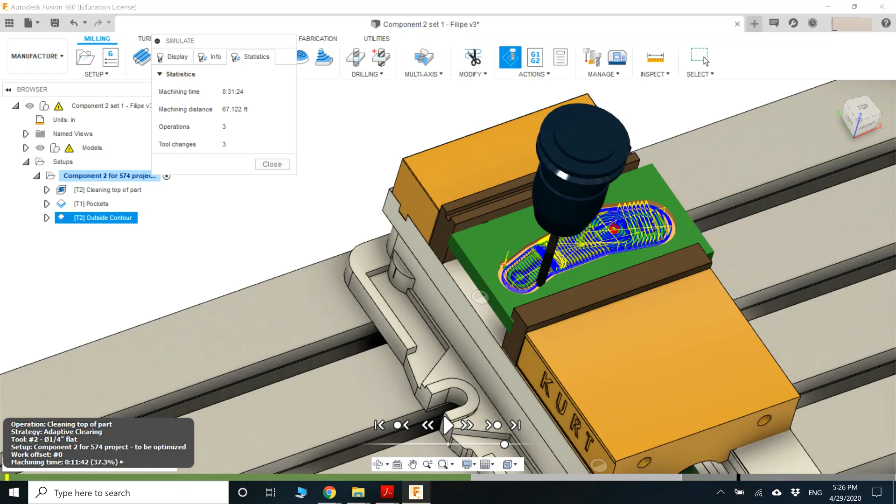And here, if you notice this time frame here, this is always going to show you if you have any problem. For example, let's say you had a red flag here instead of this yellow flag. It's going to show you that the machine is going to crash at this time, and this is what's happening. So always keep an eye on this time frame here. It's always going to give you very good information about your part. Okay. Once you're done simulating, you see everything is okay, nothing's crashing, nothing is going all the way down and crashing into the vise or anything like that.

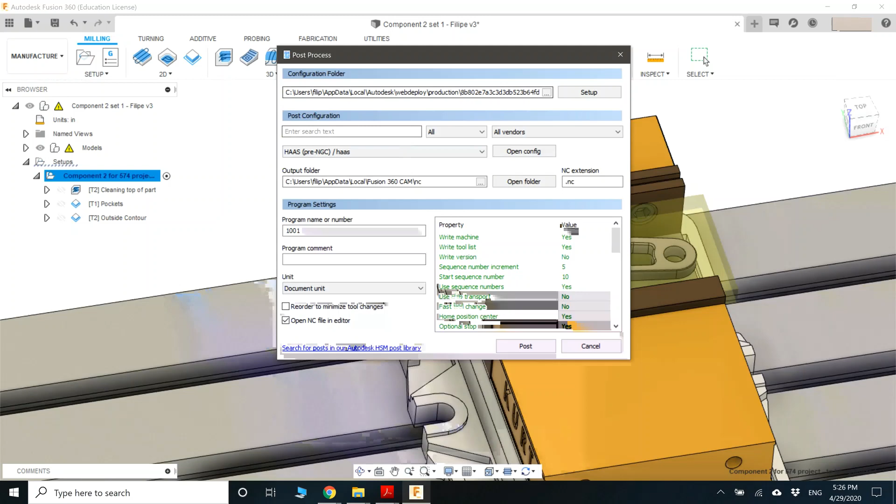You can click on Actions, Post-Process. In this case, we're going to be generating our G-code. Select the machine that you're actually using. In my case, I'm using a Haas Mini Mill. Give your program a number. I'm going to call it 010101 or just 0101. Post-process, select any folder, save it, and there you have your G-code right here. As I mentioned, the name of the operation appears in parentheses. That's a comment in G-code. So that's basically your G-code from your programming.

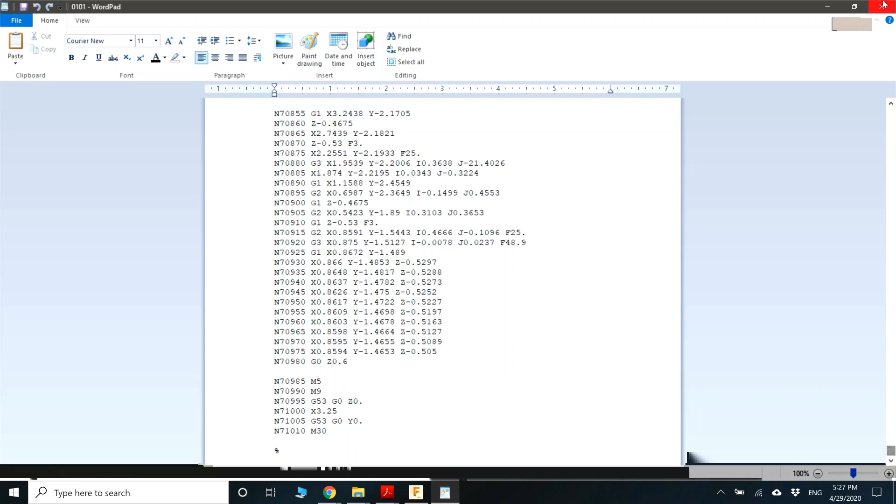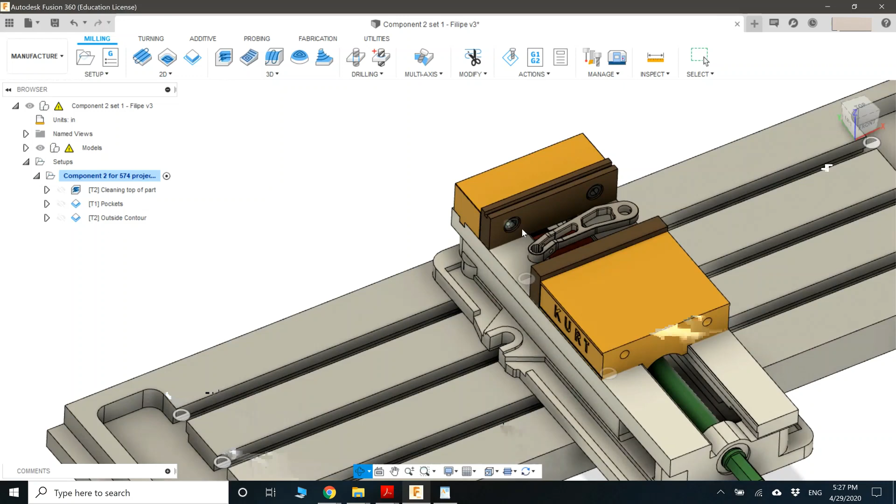So in this video, we showed you basically how to import your part in Autodesk Fusion, switch from design to manufacture, create a setup, create your operations, and export a G-code. All of these are the very basic steps for CAM, computer aided manufacturing, in the case of CNC machining or CNC milling.